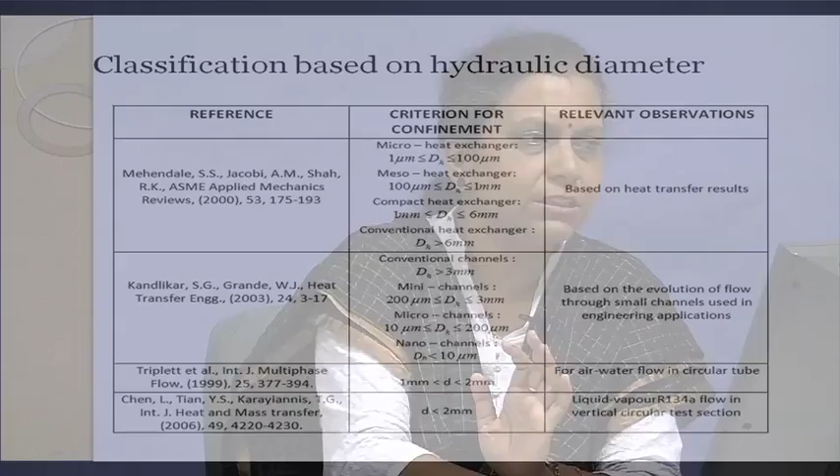So the initial classification was based on hydraulic diameter. You can see that these classifications have been done both on the basis of compact heat exchangers as well as for conventional channels.

If you look into them, you will find that one particular person has defined the mesoscale for heat exchangers between 100 micrometer to 1 millimeter, while the same thing has been defined by someone else based on 200 micrometer to 3 millimeters.

So we find that there is quite an amount of disagreement between these, and there is no exact definition or proven criterion available for distinguishing the micro domain, the macro domain, and the transition between the two.

Knowing fully well that the transition does not occur abruptly at one particular dimension, I cannot say that above this it was macro, below this it is micro. So there is a range over which the characteristics of the macro domain gradually get transitioned to that of the micro domain. Now, the initial attempts were just to define it in terms of hydraulic diameter.

In this situation, what people actually wanted to do was differentiate the studies which have already been reported in macro systems and the studies which were currently being reported in reduced dimensions, which were not tallying with the information already available.

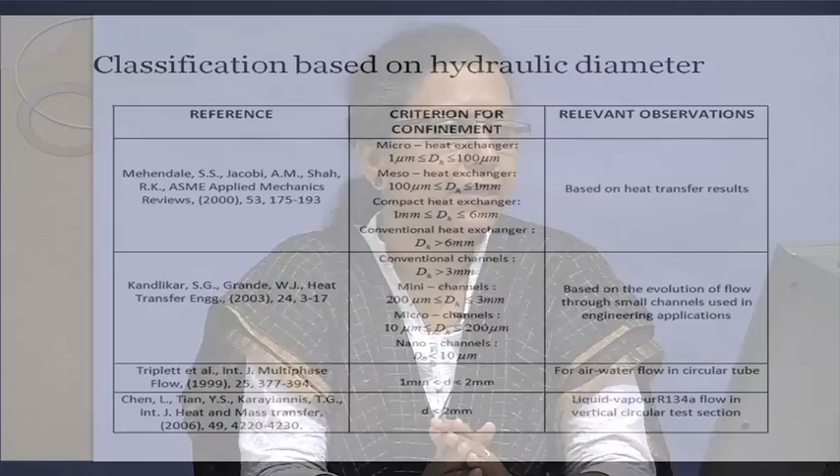At this stage, I would also like to mention that when the classification was based on hydraulic diameter, what people found was they were just defining it in terms of the physical dimension, but then they realized that the physical dimension alone is not sufficient.

For example, suppose we are working at a very high pressure, and boiling is occurring and bubbles are generated. At this high pressure, the bubbles generated will be very small, almost micron size, and under that circumstance a 1 millimeter channel can serve as a macro domain. On the contrary, in the same tube, if we are working under sub-atmospheric conditions, then it would behave as in the micro scale.

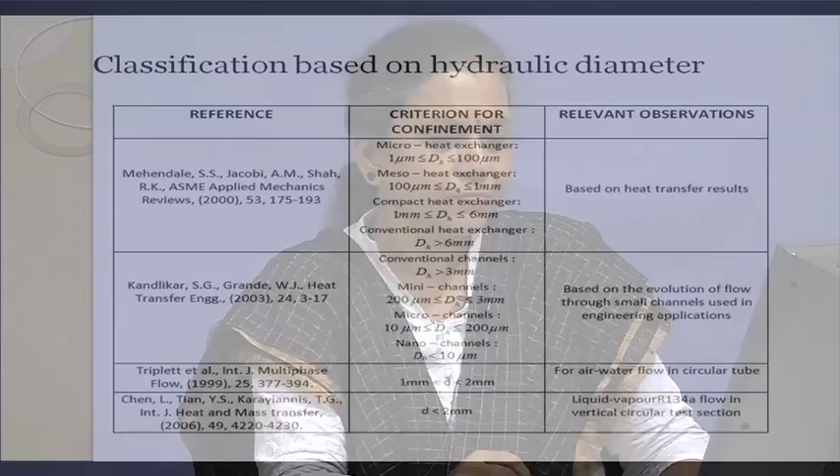So, from here people came to know that simply defining micro, macro and meso in terms of physical dimensions is not sufficient, and then they started defining several dimensionless parameters.

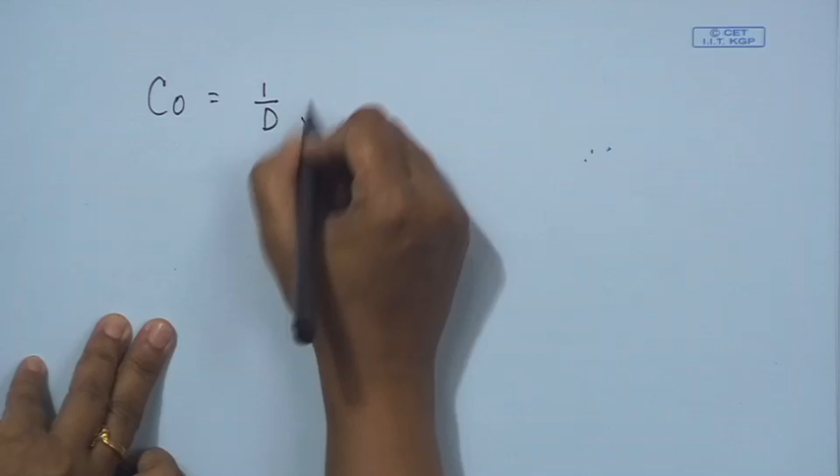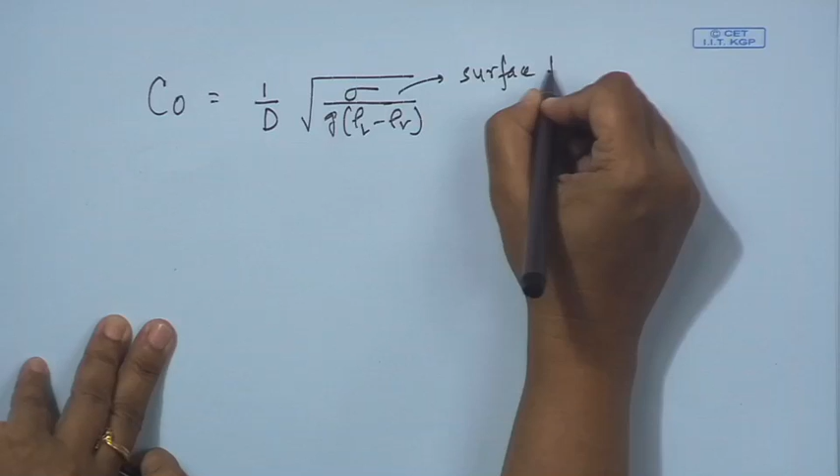The different dimensionless parameters which were used, first was known as the confinement number, which is defined as 1 by d, root over of sigma by g into rho L minus rho V. It is very evident that it gives you a balance between the surface tension forces and the buoyancy forces.

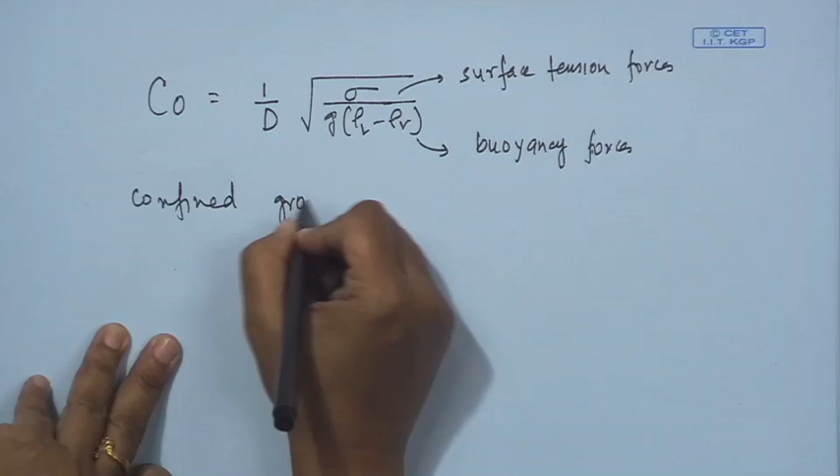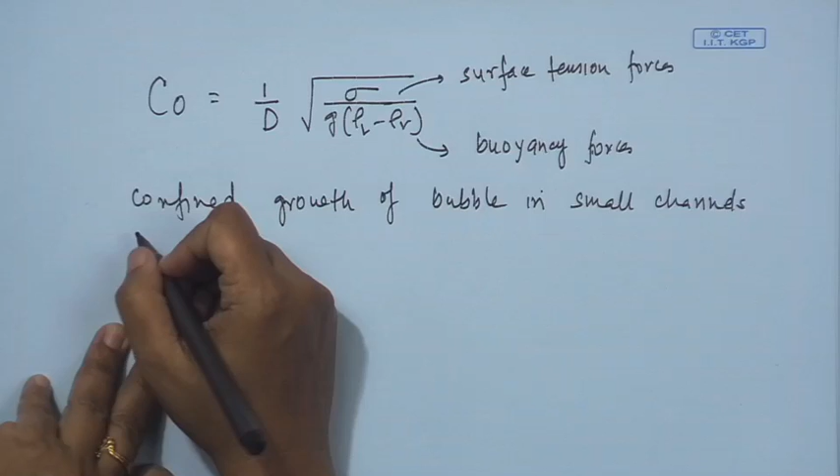Now, this number is based on the confined growth of a bubble in small channels, where the effect of surface tension was important.

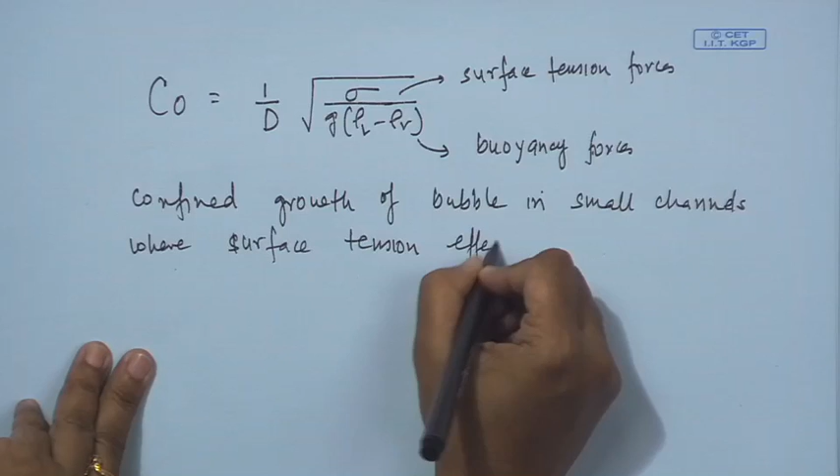So, this was primarily practiced for flow boiling situations, where normally in a large channel, a bubble starts forming at the nucleation site, and then it gradually becomes larger and larger. At some particular critical diameter, it detaches from the site and starts rising due to buoyancy, and when there is a flow system, it is also pushed faster due to the flow, and the detachment occurs at a faster rate.

Now, in small channels, what happens is, when the bubble starts forming at the nucleation site, before it can detach from the site, it gets confined by the upper wall, as a result of which it cannot escape from the nucleation site, and it starts becoming larger and larger.

Now, this definitely depends upon the surface forces, or the surface tension. In other words, the role of surface tension must be quite important in deciding the maximum bubble radius.

We know that the maximum bubble radius at detachment will decrease at the expense of the gradual suppression of the gravity force with channel diameter. So, as the channel diameter decreases, this maximum bubble diameter also decreases due to a decreased effect of gravity forces.

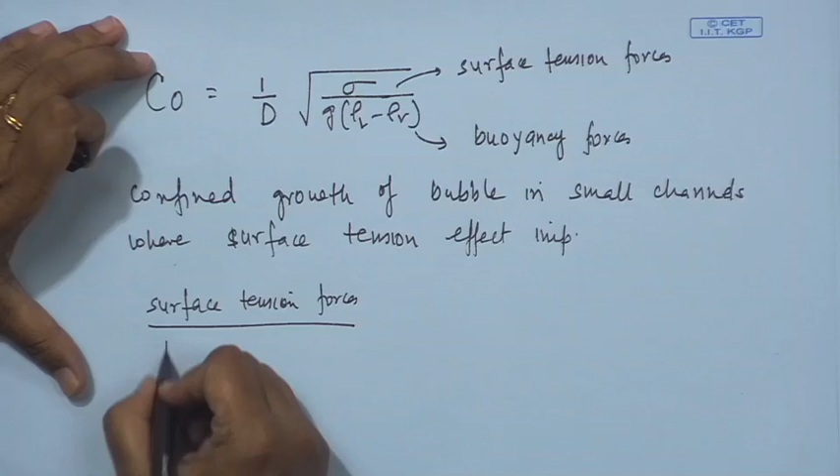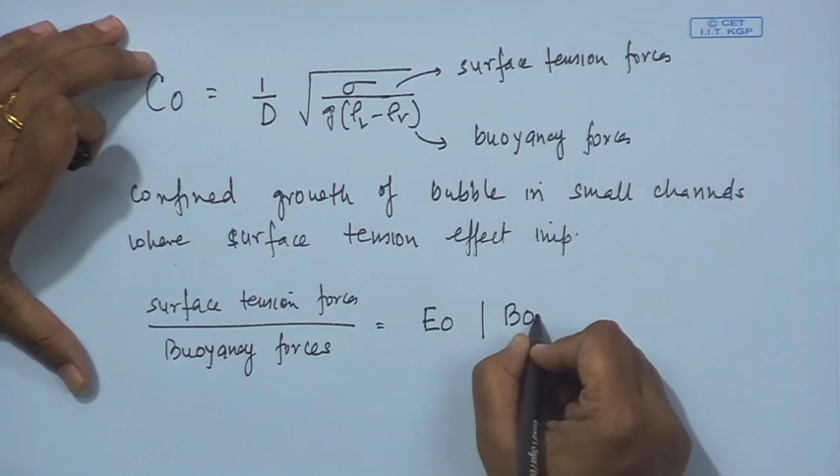Apart from this, there was another important dimensionless group suggested in order to decide the criteria for microchannels, which is also a balance between surface tension forces and buoyancy forces. This particular number is often defined as Eötvös number, or a reciprocal of it is defined as the Bond number. Different researchers have defined it in different ways, some as a Eötvös number, some as a Bond number.

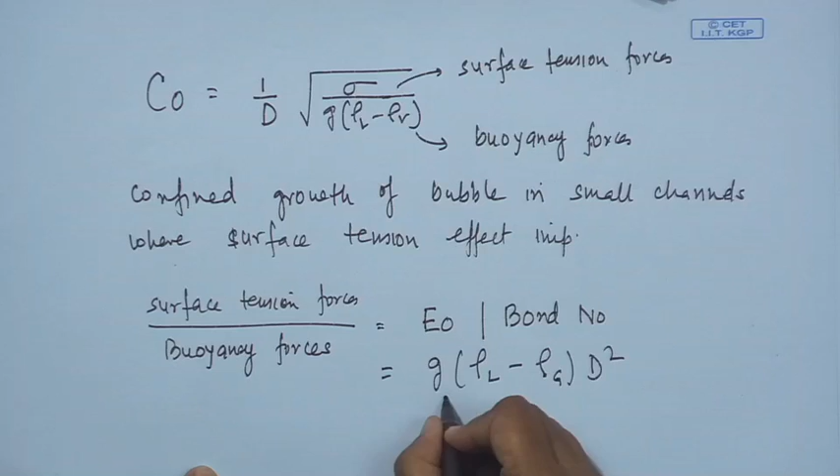This is the reciprocal of it, often defined as g into rho L minus rho G into D square by sigma. This has been defined, I believe, by Ullmann and Brauner. They suggested that Eo close to 1.6, which corresponds to confinement number close to 0.79, is going to decide the criteria between macro and micro channels.

On the other hand, Brauner and Moalem-Maron had a slightly different definition of this Eötvös number, and proposed a slightly different criteria for this. The criteria proposed by Brauner and Maron had a 4 pi square in it, as a result of which the definition was slightly different in this particular case.

We find that the criteria they have defined was correlated to some particular physical observation. What were these physical observations? First, stratification may be suppressed. All of us know that when stratification gets suppressed, it marks the termination of macro scale.

The other criterion suggested was the onset of symmetric phase distribution in horizontal pipes. So usually it was thought that once stratification gets suppressed, it is the termination of macro scale, and when the phase distribution becomes symmetric, this is defined as either symmetric plug flow, or in annular flow, the film in the upper and lower part of the channel being more or less symmetric.

It will be interesting to observe the different criteria people have selected, which explains why there is so much discrepancy in the criterion for defining a microchannel.

For example, one research group, Kew and Cornwell, decided on the basis of the confinement number, which marks the existence of confined bubble flow. Then there was another group, Suo and Griffith, who defined it in terms of the Eötvös number, which suggested negligible buoyancy effect on the Taylor bubble — similar to the onset of symmetric flow distribution I mentioned earlier.

Then another group did a very extensive review of the characteristics of two-phase flow and suggested criteria on the basis of six dimensionless groups.

They had chosen the Bond number and the superficial Weber number of the two phases. As I already mentioned, the Bond number gives the ratio of buoyancy to surface tension forces, while the Weber numbers of the two phases give the ratio of inertial to surface tension forces, both based on inlet input conditions.

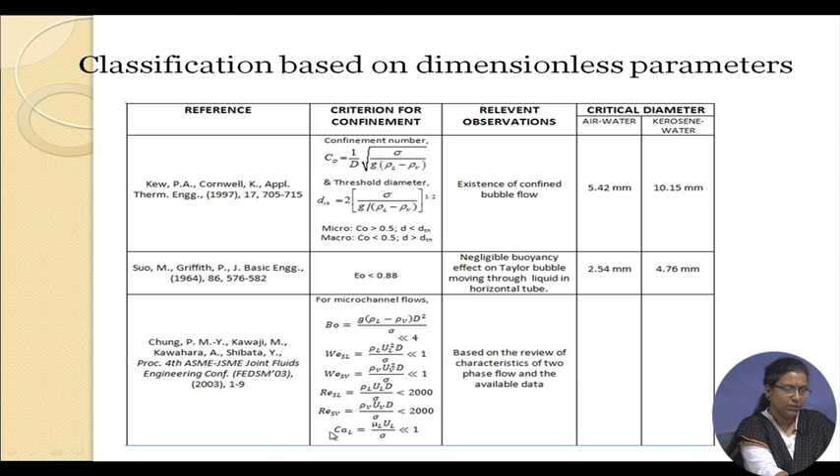Based on these numbers, they decided the criteria primarily on the Bond number, then fixed all the other numbers to decide the domain of microchannel flow. Here again we find that mostly people have used the Bond number and Eötvös number, and as mentioned, another group decided upon six groups including superficial vapor and liquid velocities.

Then there was another group that defined two diameters: one was the threshold diameter, the other was the critical diameter. Based on these two definitions, they defined the threshold diameter.

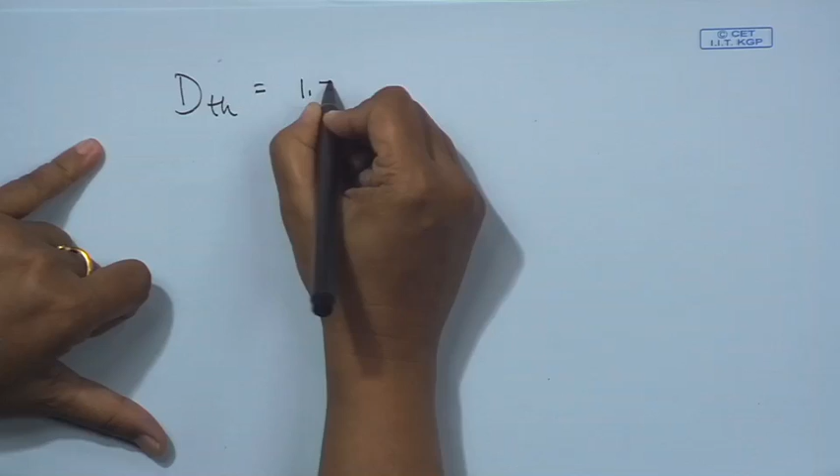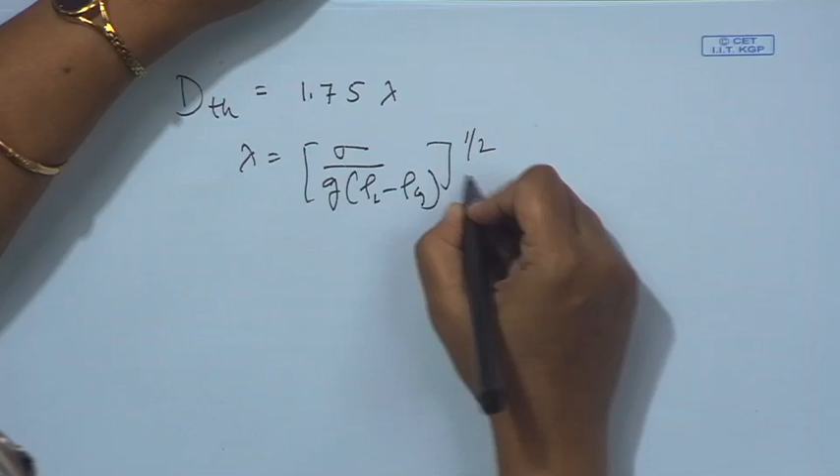The threshold diameter is 1.75 times lambda, where lambda is the capillary length, which I've already defined earlier, given as sigma divided by g times rho L minus rho g, the whole raised to the power half. This is known as the capillary length or capillary constant.

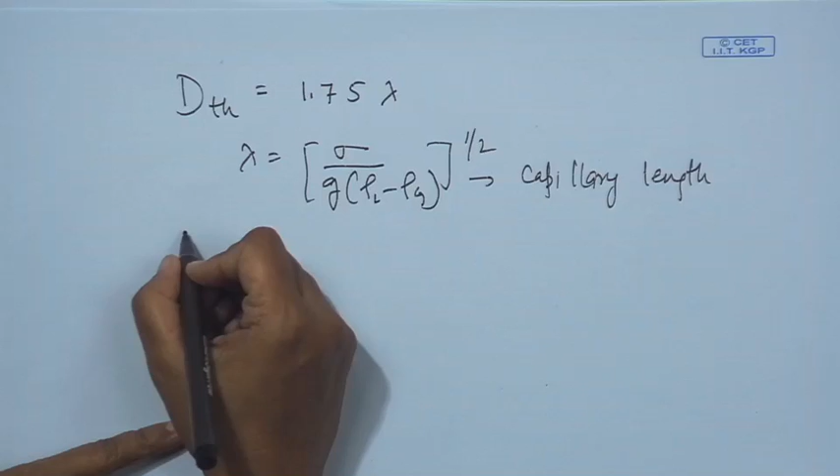So what the Li and Wang group did was define two diameters: one as the threshold diameter, which was 1.75 times lambda, and the other as the critical diameter, which was 0.224 times lambda.

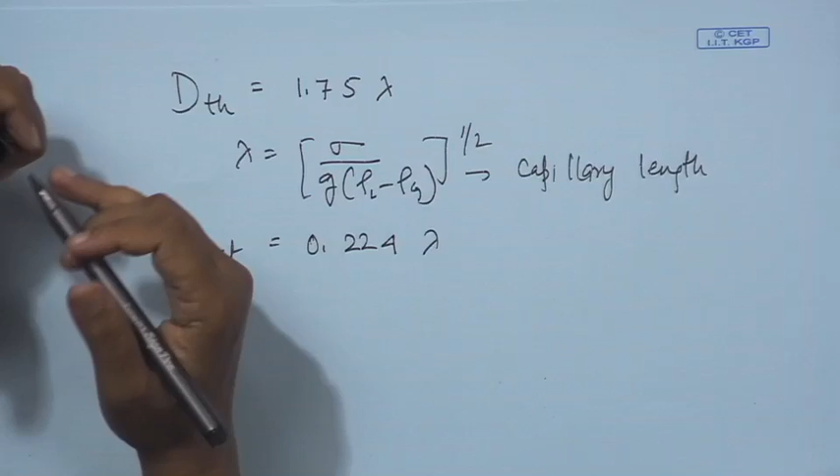Based on these two diameters, they found that for certain cases, when the conduit dimension or equivalent diameter was less than or equal to the critical diameter, gravity effects were insignificant, and annular, elongated bubble, and bubbly flow regimes were all symmetric.

Then they found that when the diameter was in the range between the critical and threshold diameter, gravity effects were visible, but surface tension effects were more dominant, so stratification was not present, though non-symmetric effects on annular, elongated bubble and bubbly flow regimes were quite evident.

And again, when the diameter was greater than or equal to the threshold diameter, the effect of surface tension was small relative to gravity, and they found that the condensation flow regimes were similar to those in macrochannels.

Now, one thing I just forgot to mention, this particular researcher group determined the effect of conduit size on 2-phase flow regimes for in-tube condensation studies in horizontal tubes. Their postulations were based on condensation studies in horizontal pipes, and during such studies they tried to understand the

effect of gravity by investigating the transition from asymmetric to symmetric flows, and they did it based on the Young-Laplace equation, where the capillary constant was defined, and two dimensions were defined based on the capillary constant. Then the entire range of the macro domain, the micro domain, and the mesoscale was defined very well

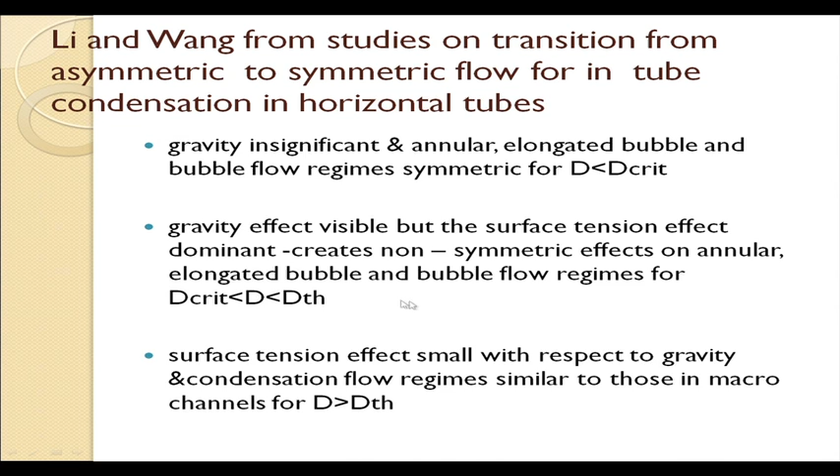by them. Well, I should say this is possibly the first proposition for macro scale, or rather macro to micro scale differentiation, which could be applicable to both adiabatic as well as flow boiling or flow condensation systems.

Previously, most of the studies were confined either to flow boiling, where the confinement number etc. was important, or to adiabatic conditions, where the Eotvos number was important.

So, more or less, what we find is surface tension is important here, and the balance of surface tension with buoyancy, or maybe the confinement of how it affects the confinement of the bubble - these things were taken as the criteria,

and the observations used to relate this particular transition, or rather to correlate it, were, as I have already mentioned, suppression of stratified flow and onset of symmetric flow distribution in bubbly, plug and annular flow regimes. So this was primarily for adiabatic flow conditions.

Now, several criteria have been suggested based on flow boiling experiments. In nucleate pool boiling experiments, we have seen that at the microscale level there is no stratification. Why? Because the bubbles get formed at the nucleation site, as I have already mentioned.

For a macro system, what happens? These bubbles start growing to a particular critical diameter, where the forces acting on the bubble are more or less balanced. The bubble gets detached, due to buoyancy it starts rising, and when there is a flow occurring, the flow also assists in its detachment from the nucleation site.

Now, in the macroscale we find that when these bubbles get accumulated on top, naturally they coalesce and form the stratified flow domain. As we all know, this stratification does not occur in the microscale situation.

So, therefore, the first researchers who adopted this concept were Jacobi and Thome. They chose the bubble departure diameter as the determining criteria for macro to micro transition.

This diameter, they postulated, was the diameter of the growing bubble when it reached or attained the size of the internal diameter of the tube before detachment. So, while it was growing, it touched the upper wall, and its diameter became comparable with the diameter of the conduit channel, and naturally after that there was no question of detachment.

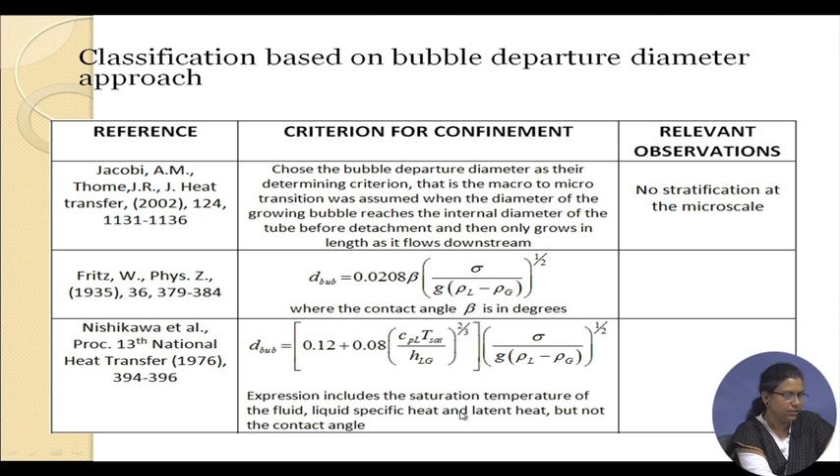flow boiling experiments. And subsequently we find that several expressions have been proposed for the bubble departure diameter. They have been expressed in terms of the contact angle. Some researchers expressed it in terms of the saturation temperature of the fluid, the liquid specific heat and latent heat, but they did not include the contact angle in their expressions.

And here also we find that in order to define the departure diameter, another dimensionless parameter has been defined. We will be discussing these dimensionless parameters after a few lectures when we discuss the importance of dimensionless groups in adiabatic two-phase flows, and later on we will discuss the same for flow boiling.

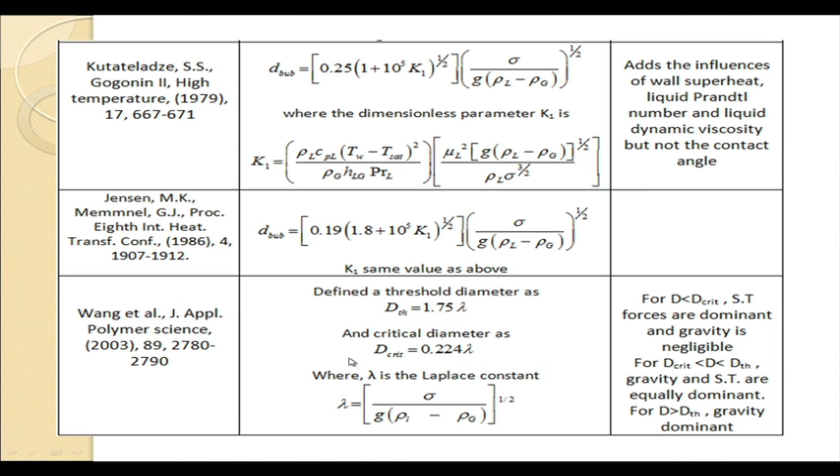So here we find it includes the influence of wall superheat, liquid Prandtl number, liquid dynamic viscosity, yet contact angle was not included here. Similarly, based on this particular dimensionless group K1, a different expression of bubble departure diameter was proposed, and in this, as I have already discussed, a threshold and a critical diameter was discussed in boiling as well as condensation, and so on.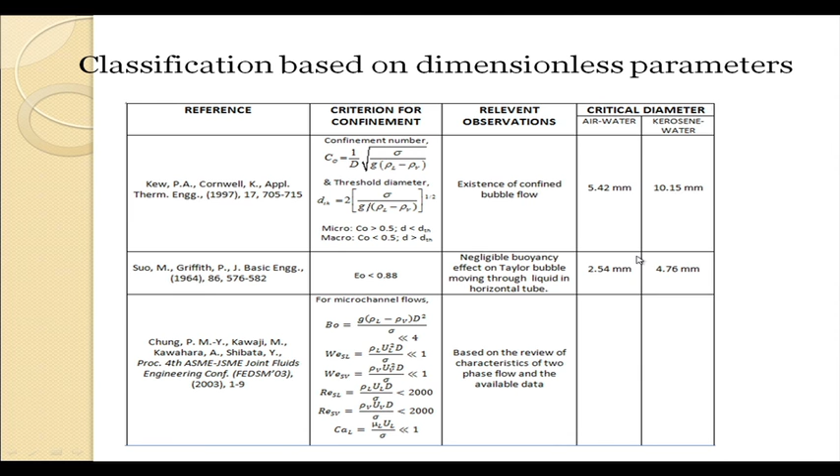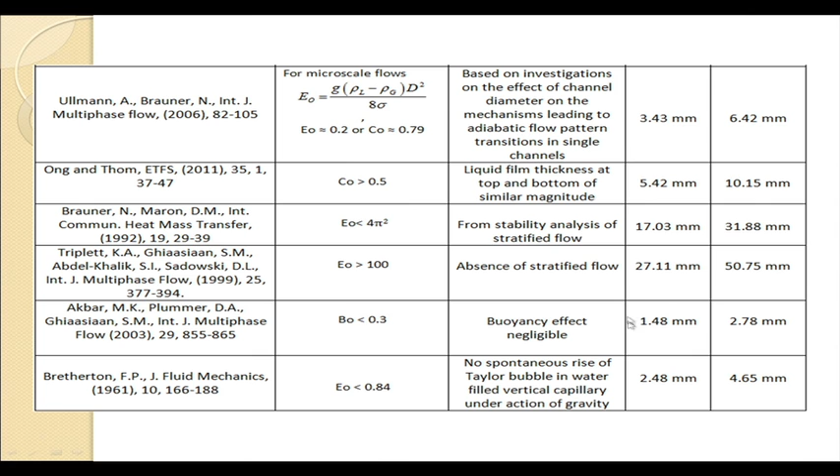Before I proceed, I would like to show you that based on the dimensionless numbers used to define critical diameter, we find that air-water systems give one set of critical diameters, kerosene-water systems give another set, and even between air-water and kerosene-water systems, the dimensions are remarkably different.

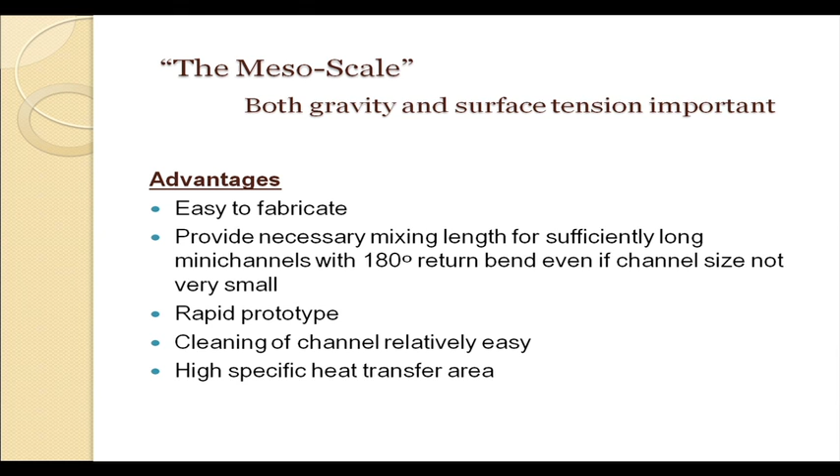Rapid prototyping is easier in mesoscale channels. The problems of channels getting choked do not happen. On the other hand, a high specific heat transfer area is also available in this particular channel.

Just to show you the uniqueness of millichannels, I will show you the flow patterns in 2.5 and 8 millimeter tubes, recorded in the multiphase flow laboratory of the chemical engineering department. You can see that for such a small difference in diameter, the flow patterns change significantly.

You can observe the bubbly flow pattern here, the increased density and size of bubbles, the regular shaped Taylor bubbles for 2.5 millimeters, and the irregular shaped Taylor bubbles for 8 millimeters. You can also observe the smooth interface in the falling film flow for 2.5 millimeters and the wavy interface in the 8 millimeter case. This shows the effect of tube diameter in the milliscale.

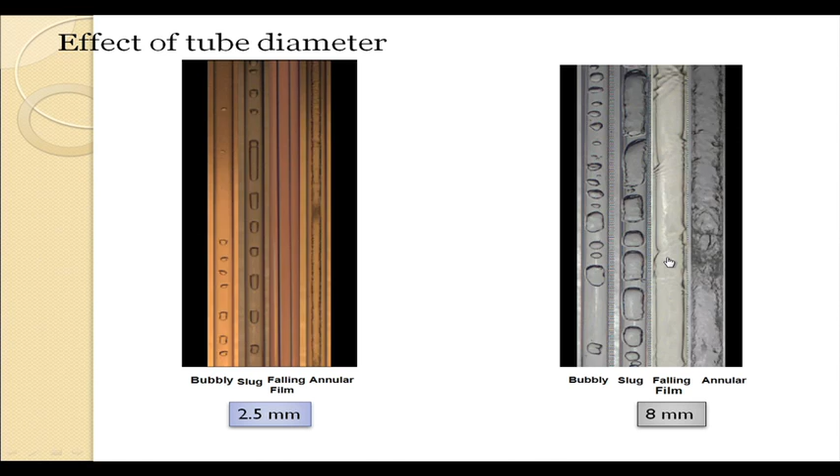Now, if we observe the effect of inclination, we find it is true that in the miniscale there is no effect of orientation, stratification is suppressed, and there is a predominance of slug flow - all of that is true. But if you observe more minutely and try to observe the range of flow patterns, we find something very interesting.

Very interestingly, we find that in the downflow orientation, the slug flow range is maximum, and it is minimum for the horizontal orientation. This shows the horizontal orientation, the black line shows the downflow, and the points show the upflow orientation.

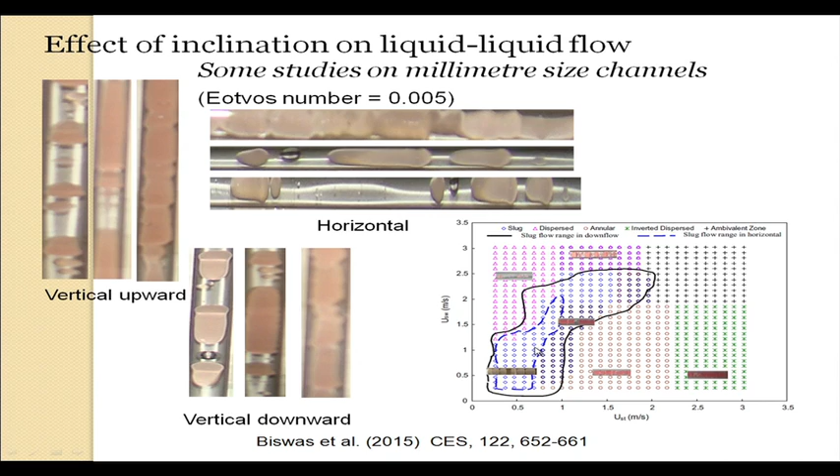So we find that although stratification is suppressed, the flow patterns appear more or less similar, or the morphology appears more or less similar, with slug flow predominant along with annular flow. Yet there is an effect of inclination, and this adds a new dimension to the study of two-phase flow in reduced dimensions.

With this, I would like to conclude this lecture session, stating that we will continue our discussions on mini and micro channels in subsequent lectures. Thank you very much.